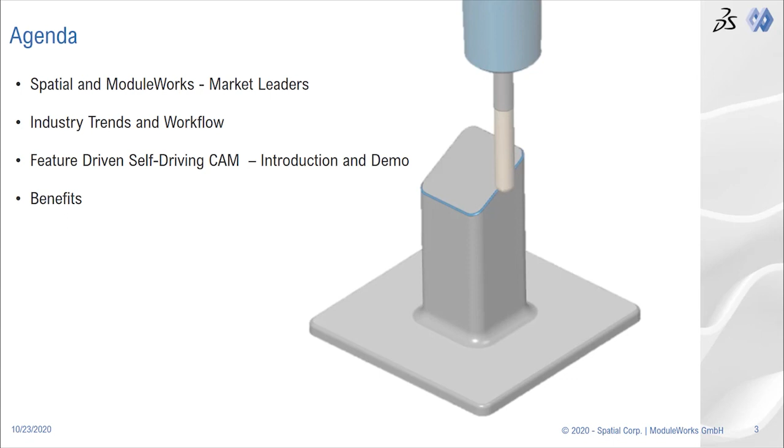Please, let's have a short look now at what kind of information we will provide to you today. First, you will receive a short overview about our companies, our expertise, our missions, and our partnership. Second, we will let you know what kind of trends and challenges we have identified in manufacturing when talking to our customers and prospects. We will introduce to you the feature-driven self-driving CAM, and Soroosh will provide a very detailed and comprehensive demo. And fourth, at the end, we will discuss the benefits.

Spatial and ModuleWorks are leading providers of components in their different industries. Robust 3D modeling is Spatial's DNA. Spatial is one of the first component providers in the modeling technology business and has more than 35 years of experience. Since 20 years, Spatial is 100% part of Dassault Systemes.

Spatial has more than 300 customers worldwide in 10 different industries. Industry-proven technology used by millions of users every day and expertise of highly qualified experts with strong industry knowledge has been helping customers with innovation.

ModuleWorks is a single-source provider of embeddable toolpath and simulation components for manufacturing. These products have been successfully deployed in digital manufacturing, digital factory, and many other areas and industries. ModuleWorks has 75% market share in CAM, which reflects worldwide market leader position.

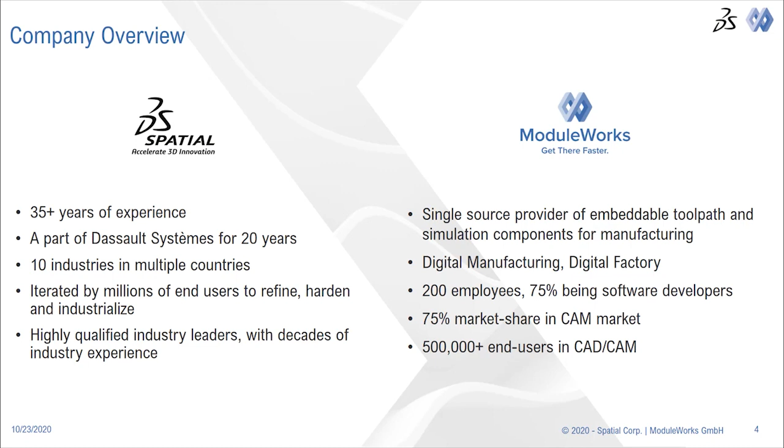From 200 employees, 75% are software developers. This shows a heavy investment in research and development. 500,000 CAM users have been using software with integrated ModuleWorks components every day.

Both companies are leading providers in their markets and industries. Spatial provides robust components to import, handle and modify geometries. ModuleWorks provides the CAM, including post-processing and simulation, as foundation of the manufacturing technologies. The partnership between both is a perfect complement. The close connection and intelligent linking of the core competencies enables companies to develop cutting-edge solutions.

We both have been talking to our customers and prospects and have identified the following challenges and trends in the manufacturing industry.

There is a demand for production of customized parts, small lot sizes down to lot size 1. At the same time, CAM programming could be complex and time-consuming, even for simple parts. CAM programmers need long training cycles before getting productive. Most of our customers confirm good qualified machine operators are difficult to find.

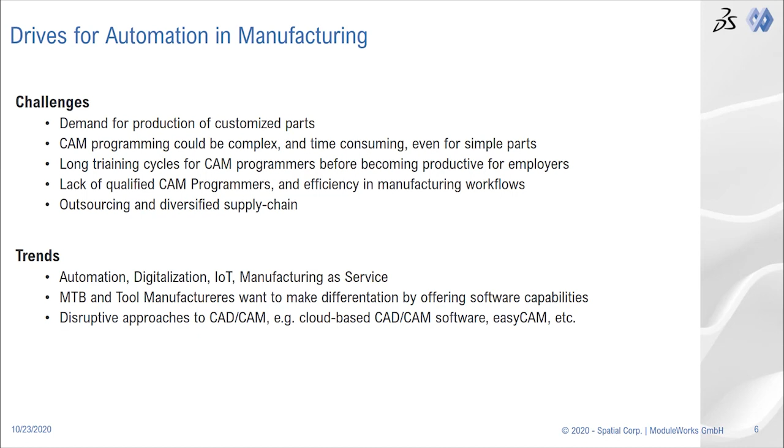Beside the challenges, we see industry trends to provide automation, digitalization, Internet of Things, and manufacturing as a service. Software becomes an important differentiator for machine builders and tool manufacturers to accelerate process-oriented workflows. We see disruptive technologies like easy-to-use cloud-based applications which provide secure access from anywhere.

On the left-hand side, you see the manufacturing workflow we are addressing. You see a classical workflow used in many manufacturing companies the same way. A CAD part is imported in a CAM system or on the machine controller. After the CAM process, the part will be manufactured on the machine.

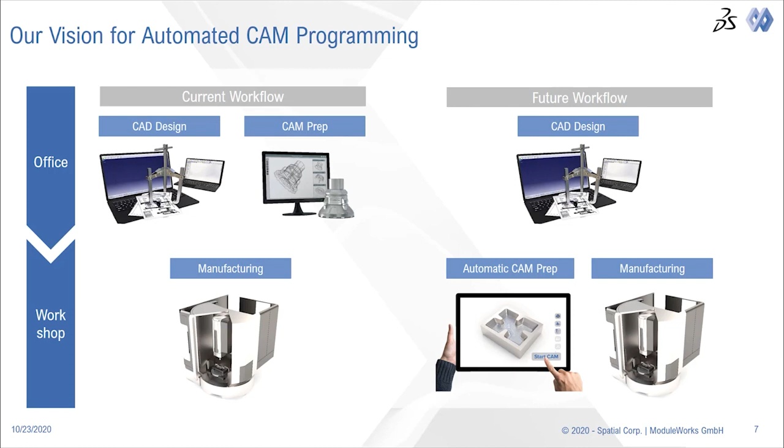On the right-hand side, you see how we would like to automate this given process and how we understand automatic machining. The part will be imported and the complete CAM process, including simulation and post-processing, will be prepared automatically on a computer or probably on the machine controller itself. And by clicking just a button, the manufacturing process will be started.

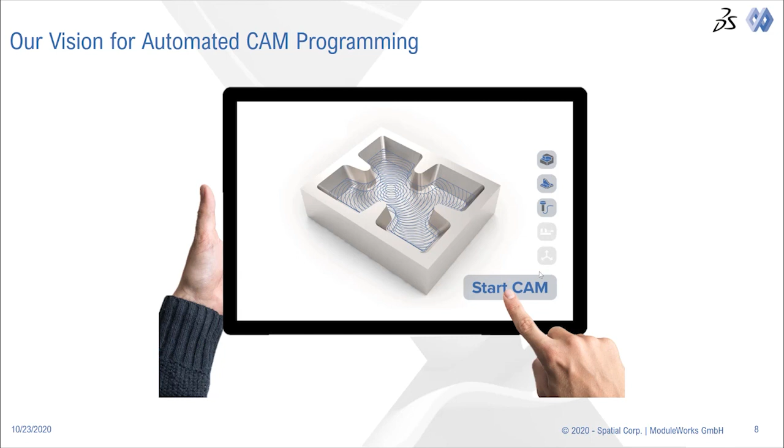Manufacturers have a lot of requirements for producing their parts. Beside the quality they require, a straightforward process and an integrated workflow from the import of the part during the whole CAM process.

In this workflow, the following influencers are involved: CNC machines and CNC manufacturers, machine builders, CAD software, CAD engineers who develop geometries, CAM software, CAM programmers who generate the code for the manufacturing process, even NC code, which is generated by the post-processor, will influence the process.

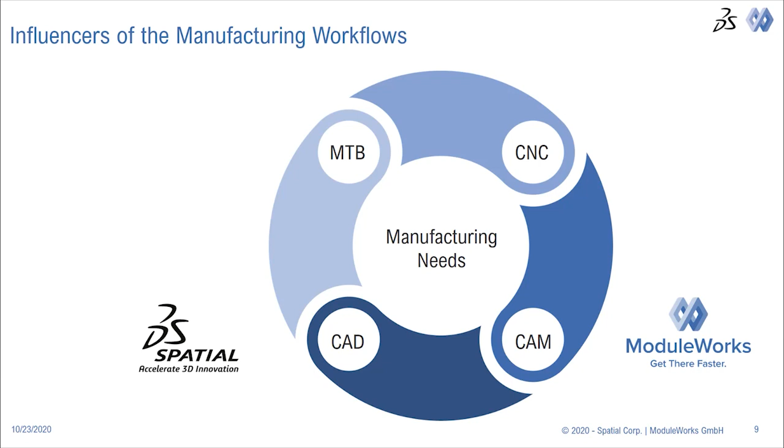The added value of our combined technologies helps to automate the process and provide a more integrated workflow which maximizes the productivity in limited boundary conditions. We provide together standard and native CAD import, graphical and semantic PMI information, nesting and auto-orientation of the part.

Additionally, automatic feature recognition and self-driving CAM are main technologies which are combined to increase the degree of automation dramatically. ModuleWorks and Spatial technologies will allow to develop a very efficient automatic CAM process. As the result, the machine operator can perform the CAM process by clicking just one button.

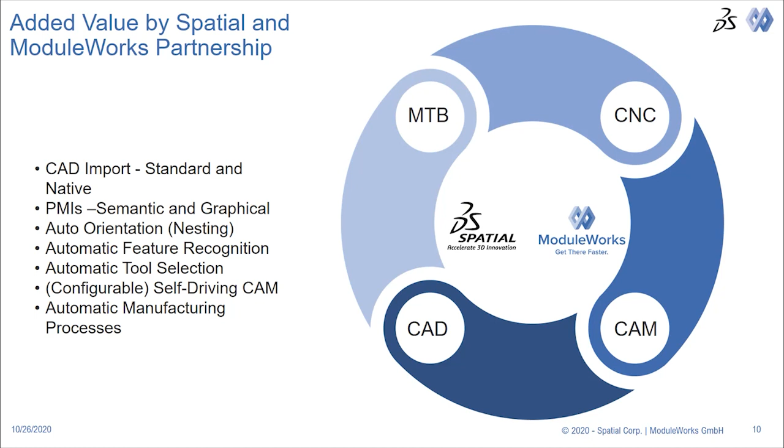These technologies are the foundation of the automatic CAM solution, which I will describe as follows: configurable automatic CAM framework application on the CNC controller or workstation, driven by automatic feature recognition and self-driving CAM for manufacturing prismatic parts for all CAD formats.

The heart of the solution is our automatic feature recognition, which recognizes pockets, holes, roundings, chamfers, and more of prismatic parts. The self-driving CAM drives the CAM processes automatically and generates the G-code for the machine as simple as clicking on just one button. Let's have a deeper look into the details now.

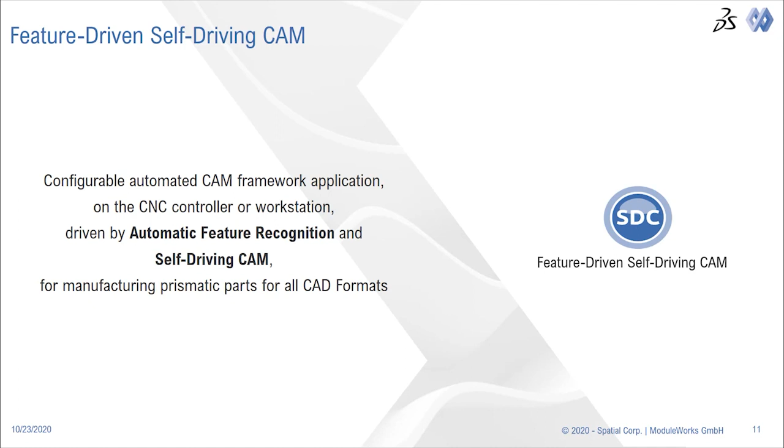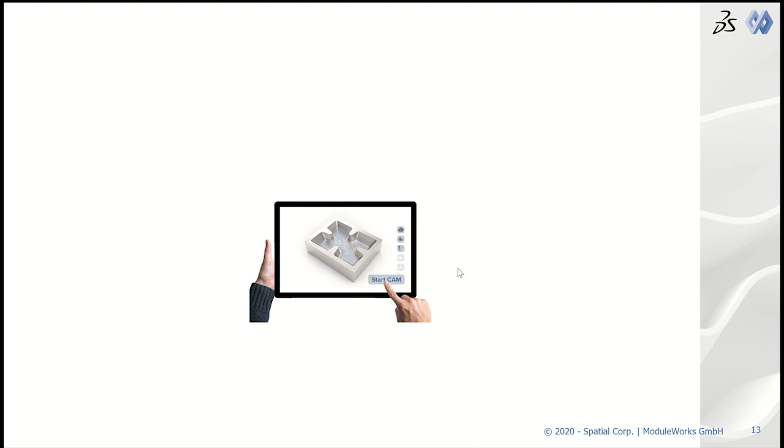It's time to get a live overview from Soroosh, the head of CAM automation of ModuleWorks, who will show you the powerful and efficient results. Thank you, Markus, for the introduction. Alongside the demo, I would like to invoke a couple of slides to conceptualize our vision about automated CAM programming and also give some insights about the process workflow in feature-driven self-driving CAM.

In fact, the idea is that the CAM operator enters the job setup parameters when he has received an order for production, and then clicks just on one button to get the G-code for the entire manufacturing process. We can enable this vision by combining Spatial feature recognition and ModuleWorks self-driving CAM technologies, which both run in the background of this system automatically.

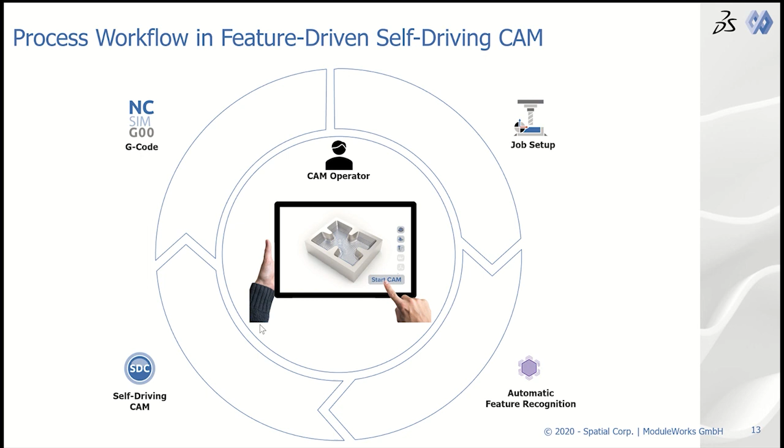We have developed this prototype which should portray these front-end and back-end processes relatively in high level. Now I'm going to launch this prototype to show you the major steps which happen in the front end and back end of this application.

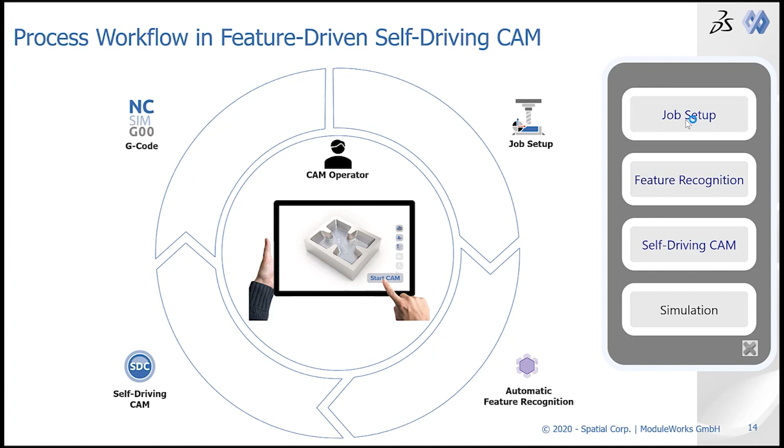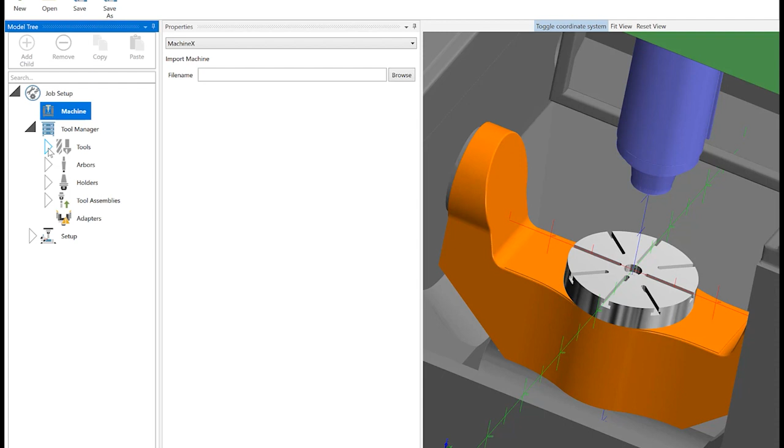The first step is to enter the job setup parameters, and for this purpose we are using the ModuleWorks Job Setup app. Here you can choose your target CNC machine from your machine portfolio, and I have chosen this machine with this kinematic as our demonstration machine for today. In the Tool Manager section, you can define your tooling based on different tool types and the corresponding dimensions. As you are parameterizing your tool, the tool preview can be seen here on the right side.

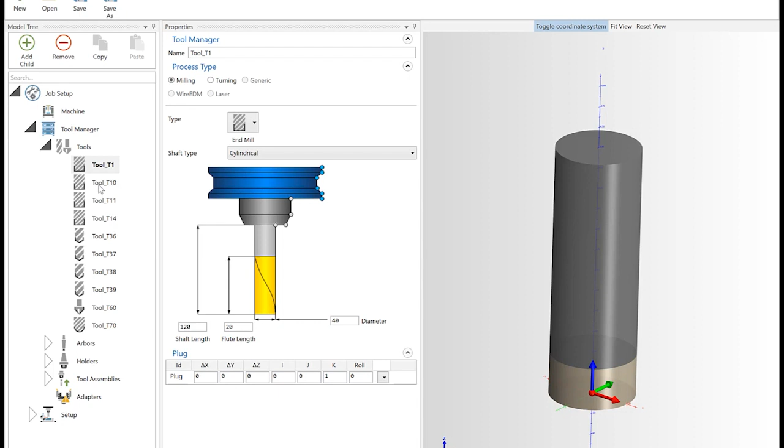As you can see, I have already pre-configured 10 different tools, where the first 4 of them are end mill tools in different diameters and lengths for my roughing and rest machining. And I also have 4 different drills, again in different sizes, for my drilling cycles. I have 1 chamfer tool and 1 ball mill to finish corners and fillets.

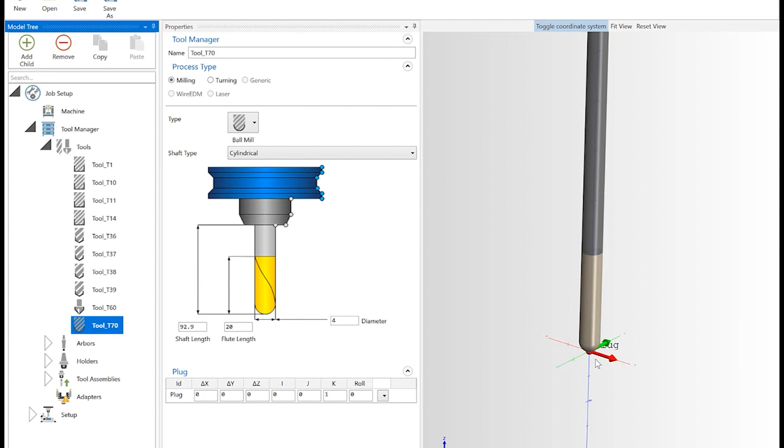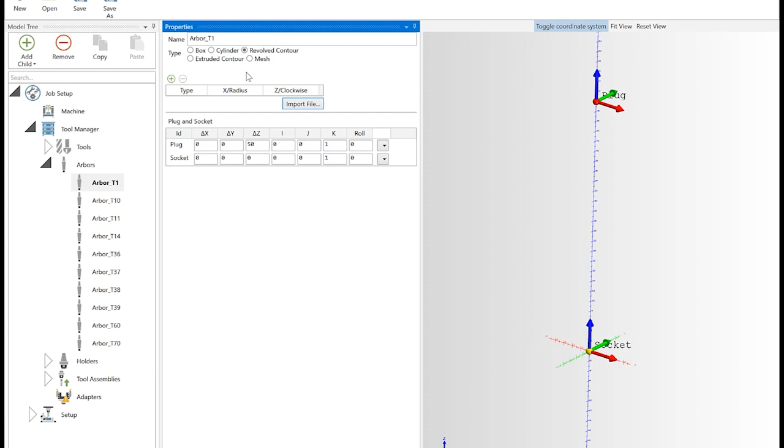Here we can define tool arbors and tool holders, basically in different methods. One is to load an IGS contour and then the application will revolve it, or we could also load the 3D CAD model of these components. For the tool holders, I have already loaded the holder mesh, and you can see all my holders here in this list.

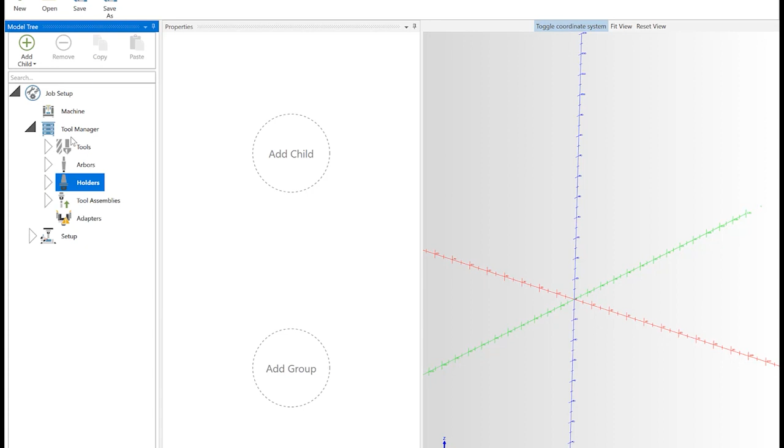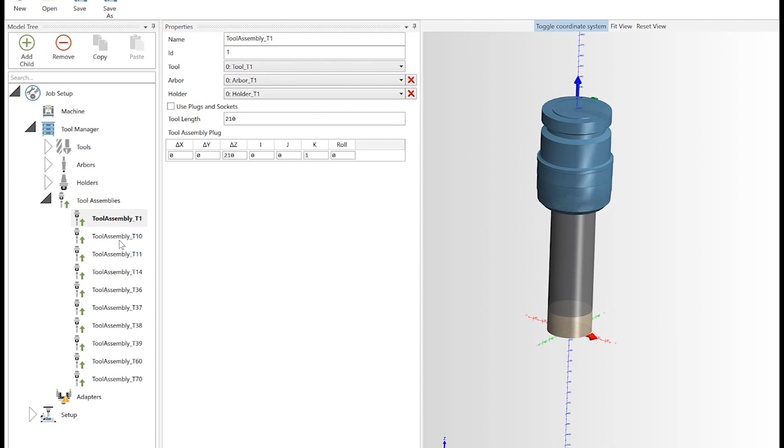Now, using all these components which we have defined in the tool manager, we can assemble our tools by choosing these components which appear in this list and stacking them together. We can define the tool ID and tool name here, which I have done already before. What you see here is basically the digital version of what we have in the tool magazine of the machine.

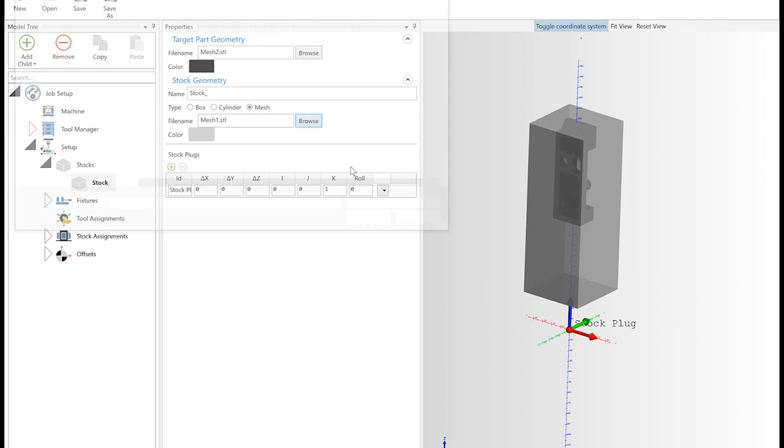Now we are done with the tool manager section, and we go to the setup section. Here in the setup section, we can load the target part geometry and the stock model from your directory. Let me change the color of the nested part in the stock such that you can see it better.

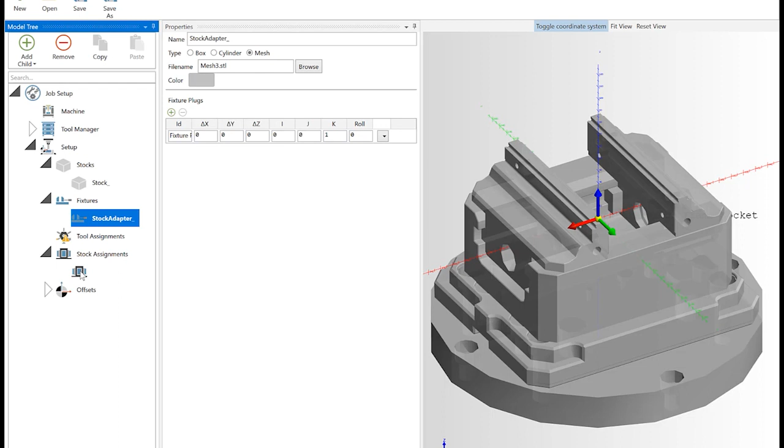Finally, in the fixture section, you can load your fixture again in the same way. And if we go to this section, you can see all the setup parameters together, which means your machine, including the digital tool magazine, and then the fixture stock, which is ready for machining. Now we can save this and go to the next step.

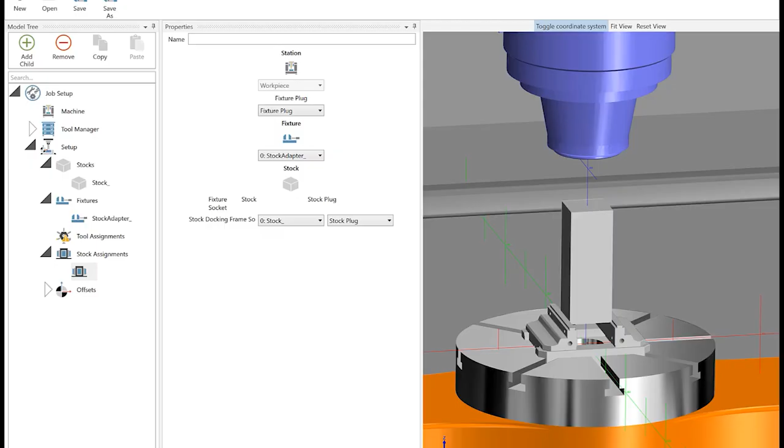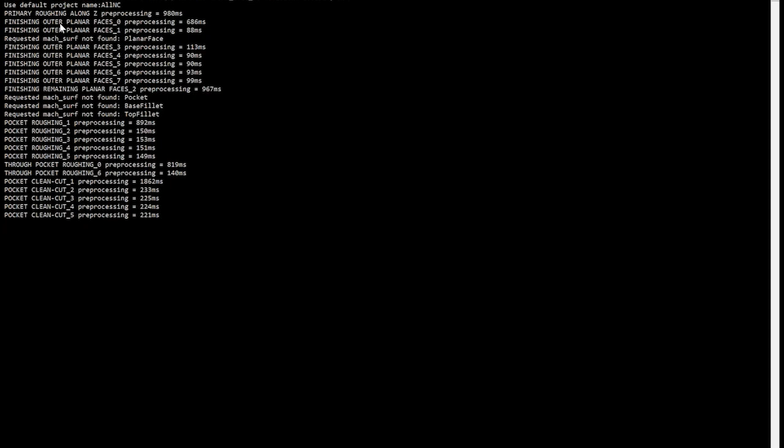Now the only thing our CAM operator needs to do as an end user is to click just on this self-driving CAM button. As you're seeing on the screen, this triggers all the necessary CAM preparation and toolpath calculation for different cycles like roughing, finishing planar faces, pocket machining, drilling, and so on.

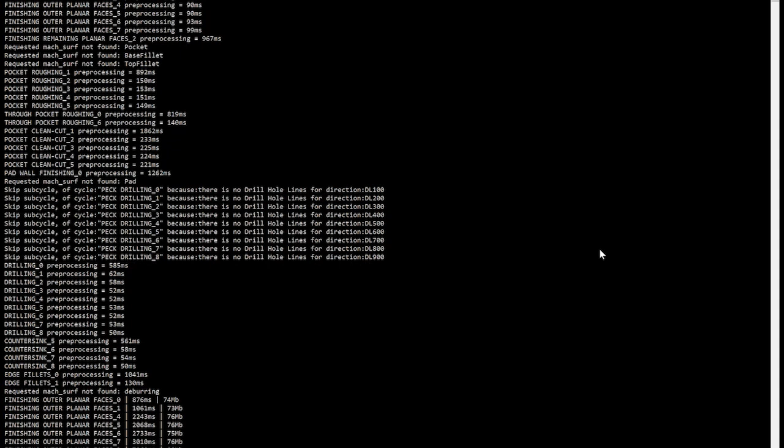For our job, the entire process will take about 2 minutes, so I let this running here, and in the meantime try to give you some insights about what is happening in the background of this system automatically. As mentioned earlier, self-driving CAM is driven by feature recognition technology, which is running in the background of this system.

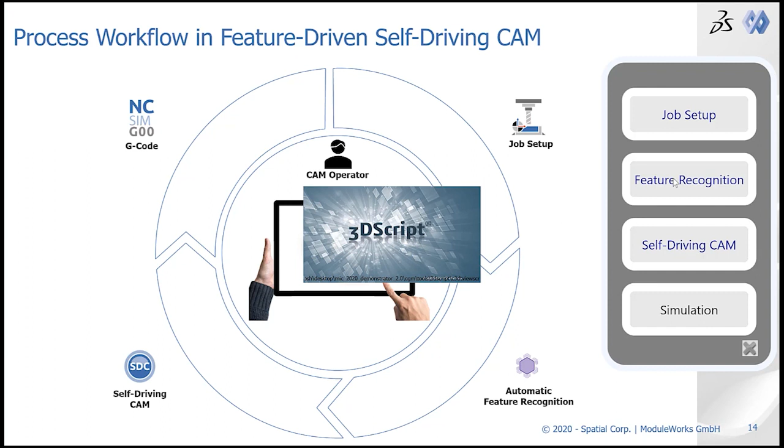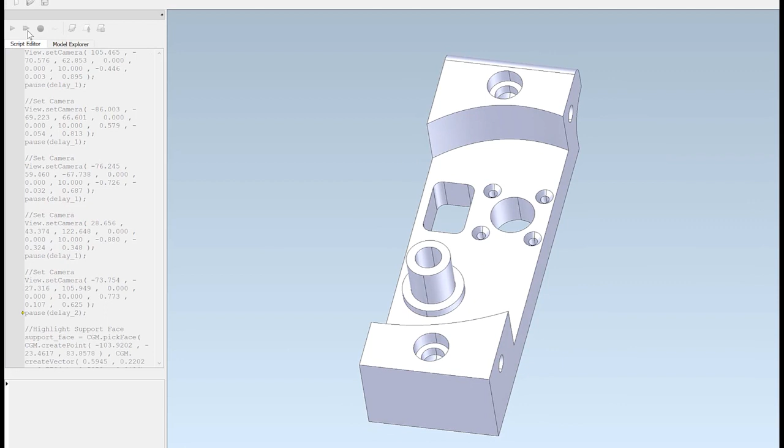Just to give you some insight about this, I'm opening the feature recognition demonstrator tool from Spatial and let the simulation running to see how feature recognition is applied on this. What we have here is the prismatic part that we have input in the job setup step. This has different CAD features on all its sides. In the first step, the yellow face is recognized as the support face which holds the part in the fixture.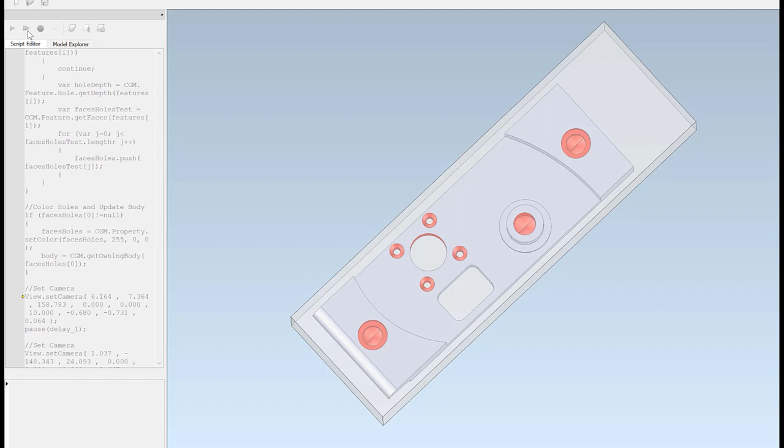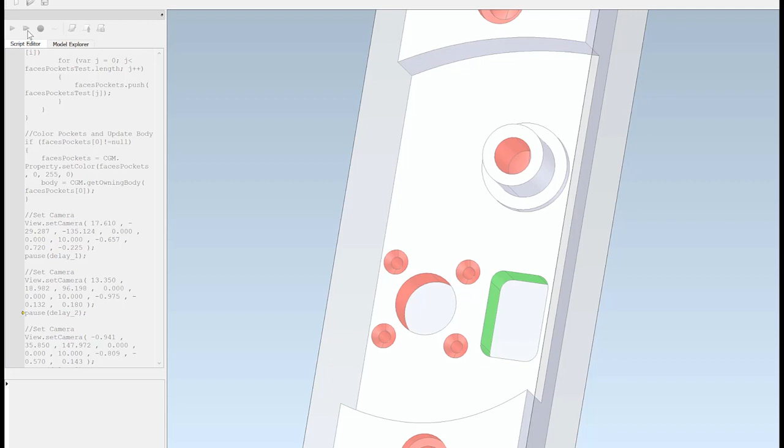Here you see the hole detection for all types of holes, basically the blind spot drills on the sides, as well as the through holes and the countersunk and counterbore holes. Likewise, the closed and open pockets are detected too. This one is the detection of the cylindrical boss with the step.

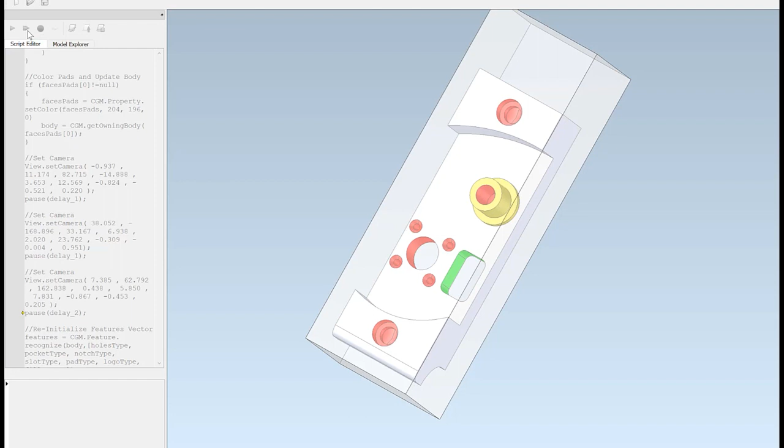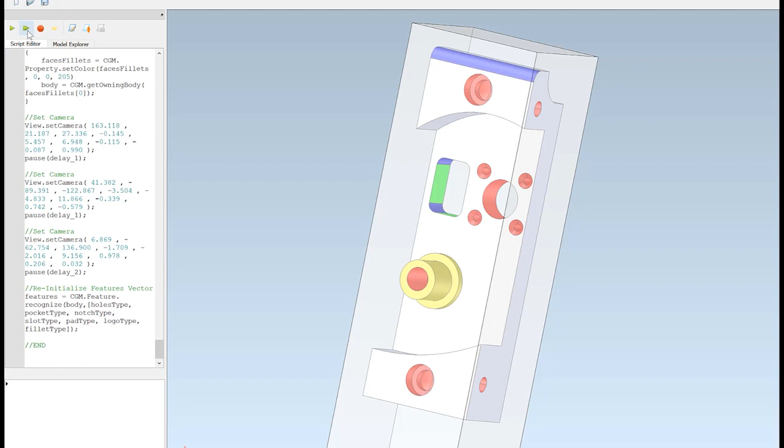And finally, we have the fillets at the edges and inside the pockets detected. Actually, what you are seeing here is breaking down the part to its individual CAD features. And in fact, this is the enabler for our CAM automation. Let's go back to our slide to elaborate on this a bit.

Let's have a short recap. The CAM operator entered these job setup parameters: the target CNC machine, the tools, the tool assemblies, the part, the stock, and the fixture. This internally created a job setup file which includes the CAD file for the prismatic part.

Feature recognition technology detected the CAD features automatically in the background and measured each individual feature. This information was passed to self-driving CAM, which includes process logics for automatic CAM preparation. Accordingly, each CAD feature, like the hole or pocket, is bound with a matching tool from the given tool magazine, as well as a correct machining direction.

This information is enough to put an appropriate machining sequence from roughing, drilling, and pocket machining together and calculate the corresponding toolpath. Lastly, the toolpath is post-processed internally for the target CNC machine, and the software outputs the NC file for the CAM operator.

Having everything said, now let's go back to check the status of the self-driving CAM job which we had triggered earlier. As you can see, different CAM operations have been created and calculated automatically. For our sample job, we got 46 CAM operations which we will simulate shortly. Also, these toolpaths have been post-processed for the target CNC machine, and we got this NC file as the output.

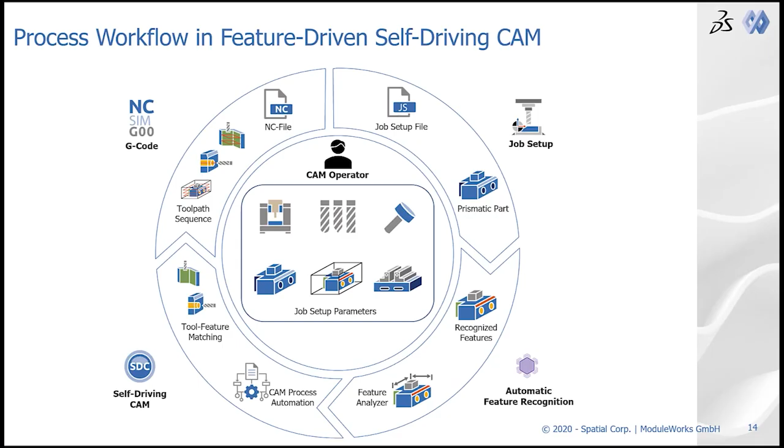So now, in fact, everything is ready for the CAM operator to start the machining. Though to visualize the calculated CAM operations, we want to simulate the output from self-driving CAM first. As far as simulation is concerned, ModuleWorks offers different types of simulation tools based on different technologies. For instance, toolpath simulations based on cutter location data, or G-code simulation, or CNC simulation, which is the visual twin of what is happening on the target CNC machine.

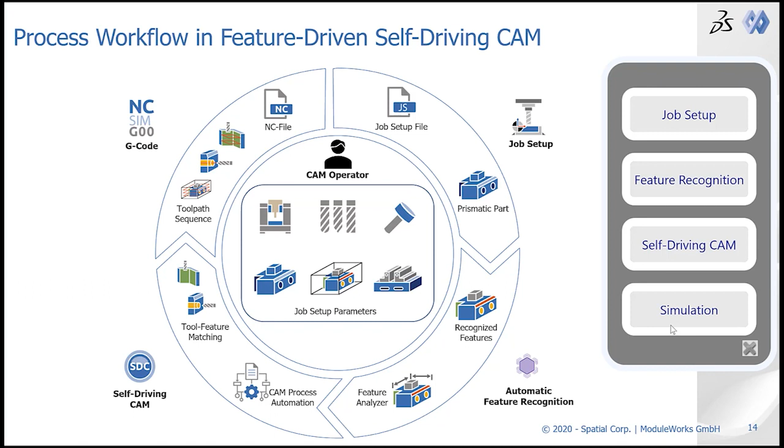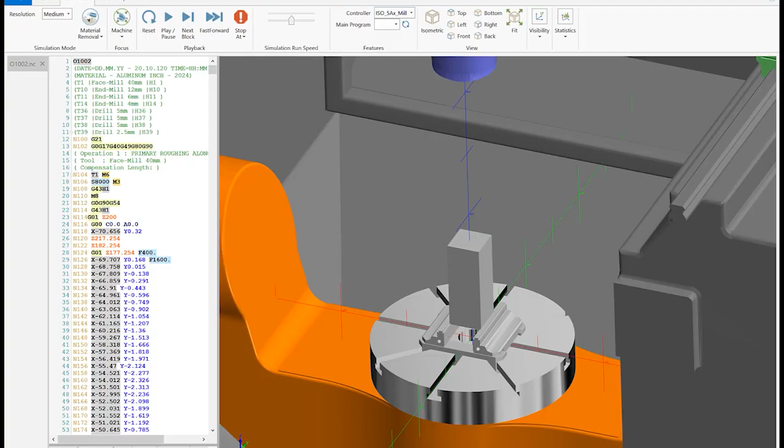Self-driving CAM output is compatible with all these products, though in this simulation, I'm deploying G-code simulation, which is powered by our NC editor product. To keep the demonstration short but still simulate the operations properly, I've prepared this video which should highlight the major steps of the machining. Let's watch it together.

As you can see on the screen, the first few operations are roughing and planar face finishing with our large face mill tool. Now we got pocket machining and boring, which take place with the smaller end mill tools.

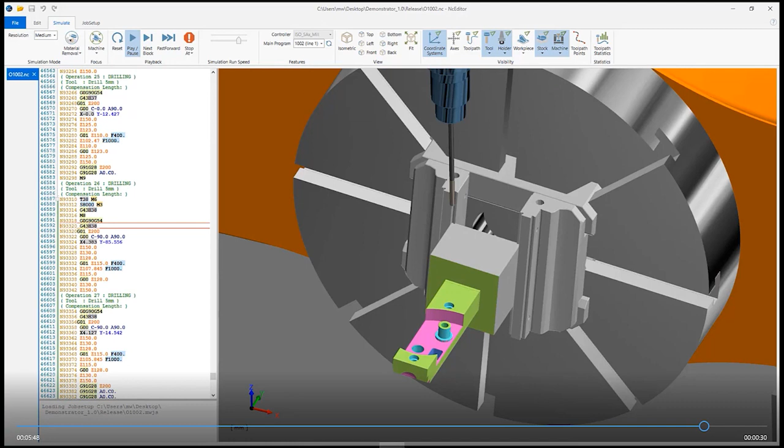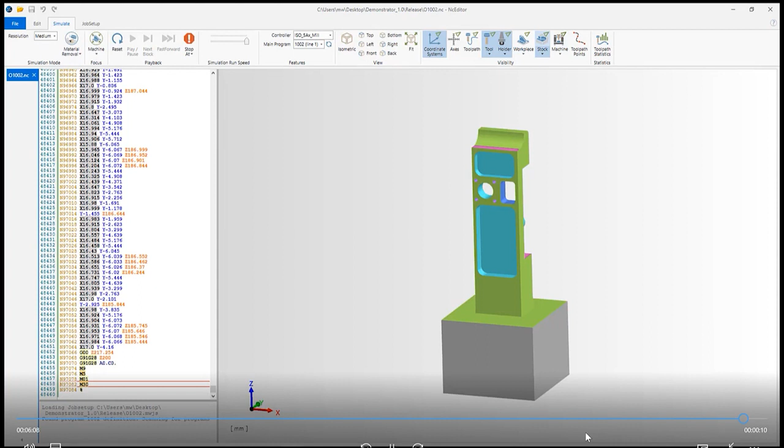Here we have the drilling operations for the countersunk, counterbores and the spot drills. And finally the fillet finishing operation. You can see that our sample part with these prismatic features can be machined perfectly without conducting the classical CAM programming, rather by the automatic CAM preparation method.

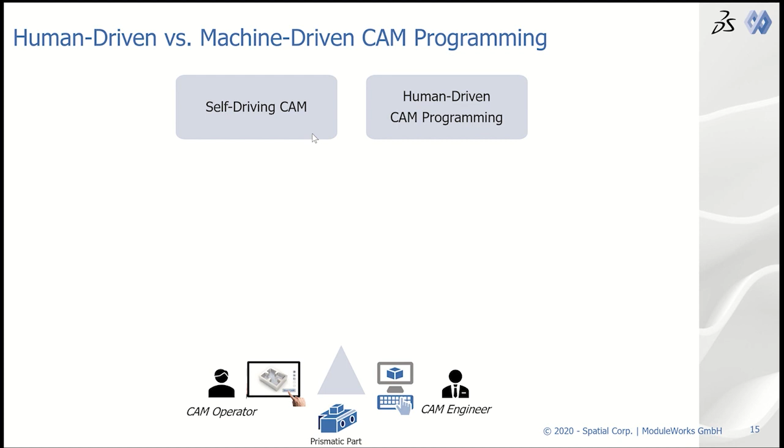Now to conclude the demonstration, I would like to highlight the resources and effort required for human-driven CAM programming and compare that with machine-driven method. In human-driven CAM programming, CAM engineers need to manually analyze the part and design an efficient machining process, then assign correct tool and machining direction to each CAD feature, and configure the necessary CAM parameters for each operation, which could be sometimes challenging. Lastly, go to the simulation step to correct the entries and incrementally validate the manufacturing program.

All these manual steps take time and require skilled CAM engineers. Also, when topology of the target parts become more complex, the corresponding costs and risk of human failure increase too. But in case of self-driving CAM approach, as you saw in the demo, the preparation for CAM is very easy and can be done even by inexperienced operators independent of the part complexity. Usually it takes just a couple of minutes to load the job setup parameters and then basically you're ready to go, as all the necessary decision making for CAM programming processes will be taken care by the system automatically.

So here is a summary. Self-driving CAM concept enables efficient manufacturing for customized parts, which can propose significant value and opportunities for job shops and machine tool builders.

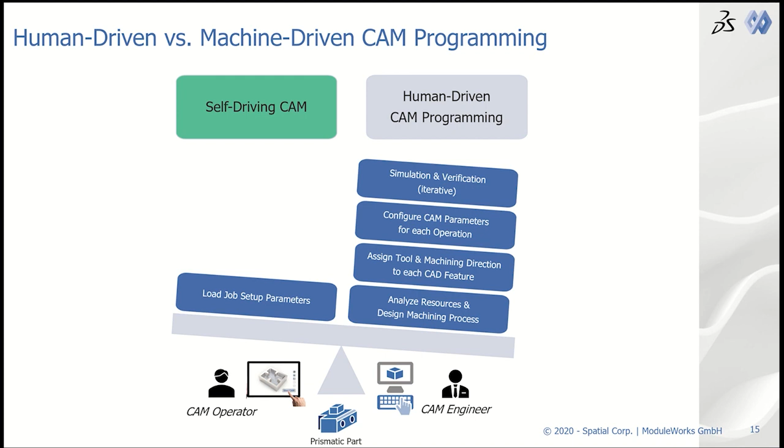Markus, I'm finished with the demonstration section. You can now take the lead and go through the conclusion section. Thank you. Okay, Soroosh. Thank you very much. This was a great overview. It was a great presentation. Very detailed, very impressive.

As a CAM vendor or CNC machine builder, the solution will be your own software, not a generic CAM product from the market. You own it, you support it, you can develop it by your own and you can enhance the software for your customers' requirements. You will implement your expertise for your customers and optimize the software for your workflows or for specific machines.

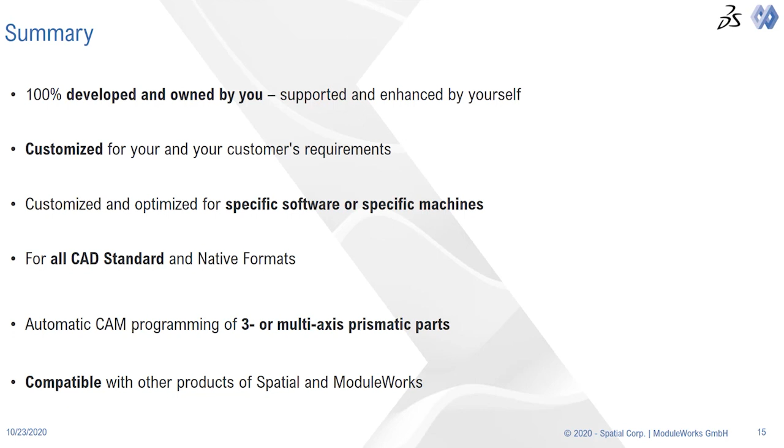I hope you found this automatic feature-driven self-driving CAM webinar interesting and useful. Our objective was to give a quick overview of how we address this challenge in the manufacturing industry and what kind of value we can deliver for CAM software developers and manufacturing companies. Before we finish, I'd like to give you a short overview about the benefits. We provide technology to develop a competitive edge solution which will help our customers to differentiate in the market and tailor their software based on their expertise and their customer requirements.

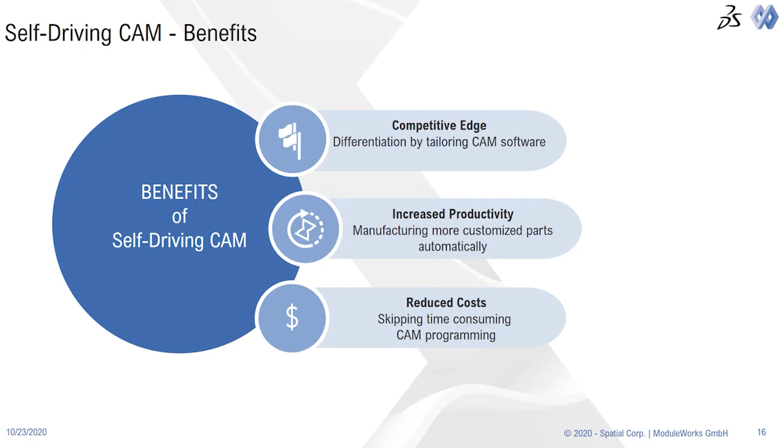Increasing productivity in the manufacturing process with automation is the key and will reduce costs, skipping the time-consuming CAM programming for prismatic parts. Simple parts could be used to have less downtime of the machines because programming time and setup time will be much more efficient through automation. Thanks again to have the chance to show our latest news about feature-driven self-driving CAM.